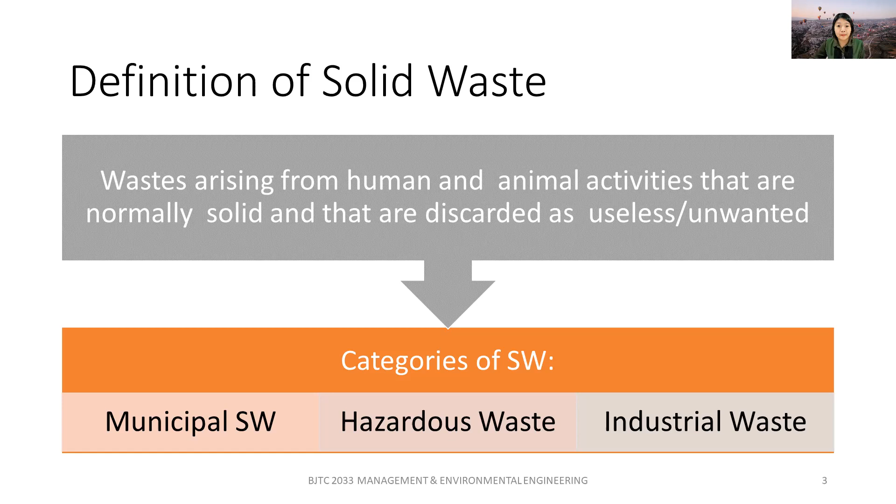Okay, so when we talk about industrial waste, then you can see from here.

You can see from here generally what the compositions of solid waste are. When you buy something, you need to know the contents, right? These are also the same - we have to know. When we talk about solid waste, I'm sure all of you usually think about recycling, that's the most common. So when you would like to recycle, how do you decide which types to recycle?

In a bag of rubbish that you usually throw outside your house, I'm sure it has a lot of things. It won't only have one thing, like kitchen waste such as fish bones, bones from meat, or vegetables that maybe aren't beautiful. So we need to know, in one bag of rubbish that you throw into the dustbin, what kind of compositions we have.

Usually for general cases, we can see the highest percentage by weight is actually organic waste, which comes from fish bones, from your food - those we call biodegradables. Mainly you can see from here we have 32% coming from organics, and then 29.5%, almost 30%, coming from paper. But nowadays, because recycling has been well educated and awareness given to all of us...

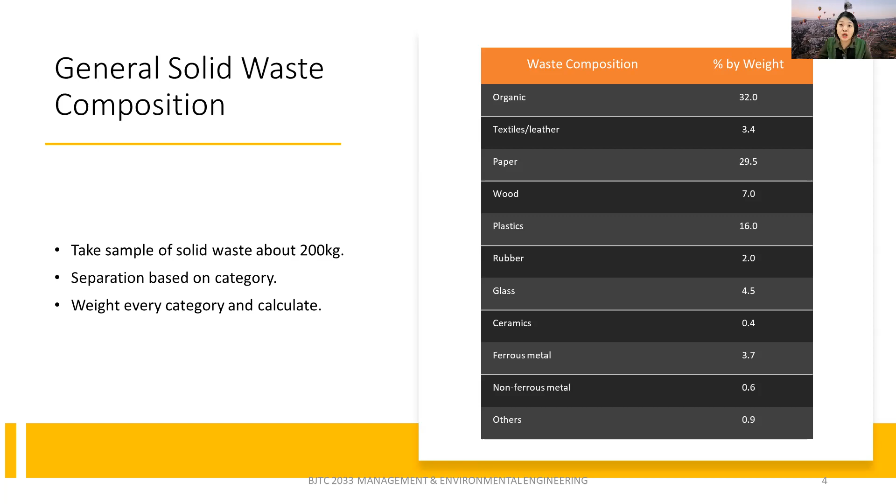So these are the characteristics and composition of solid waste. From here you can see we have domestic, combustible, non-combustible, ash, construction waste, industrial waste, and also hazardous waste. All of these you can actually read by yourself, I'm not going to go in depth for the explanations.

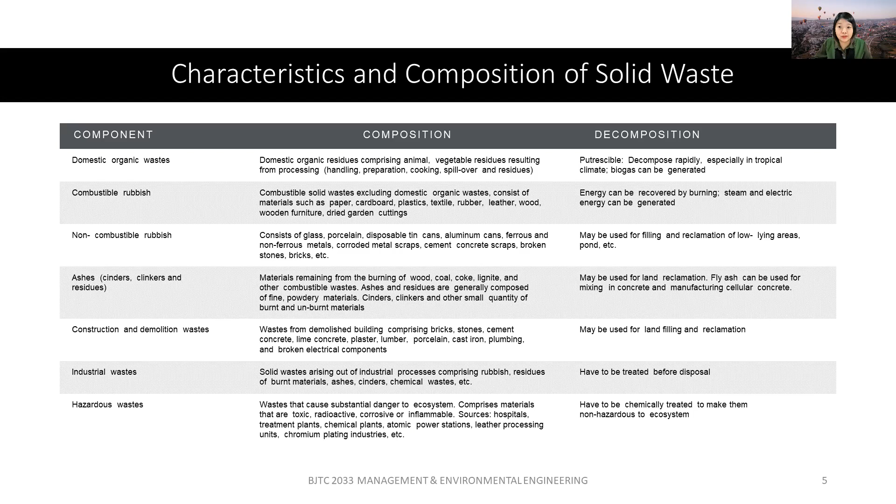So as previously mentioned, there are three types of solid waste that are major.

Okay, so first is the municipal waste. When we say municipal waste, it's things that come from our house, more general. Hazardous waste is waste that might pose substantial dangers to humans, plants, animals, any living organism.

So the third one is industrial waste. It's usually the waste that comes from industrial activities.

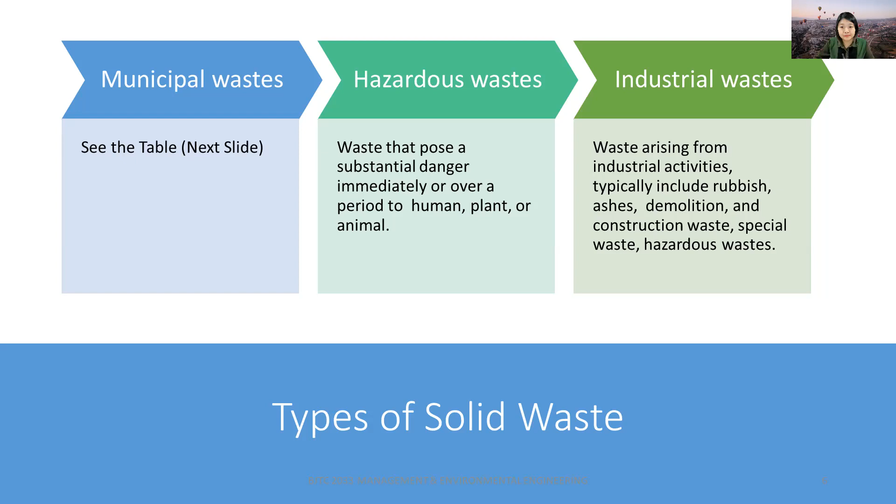Right, so this is the classification for municipal solid waste. The first one is food waste, coming from all of us. Then we have rubbish, things that can be recycled and have value, we call that rubbish. But if things have no value, we call it garbage. So these are the differences when you say this is garbage or this is rubbish. There are different meanings.

And then we have ash, demolition and construction waste, and then we have special waste, things like street sweeping, roadside litter or debris, dead animals, abandoned vehicles. And finally there are treatment plants, coming from our wastewater treatment plant or water treatment plant, something we call sludge.

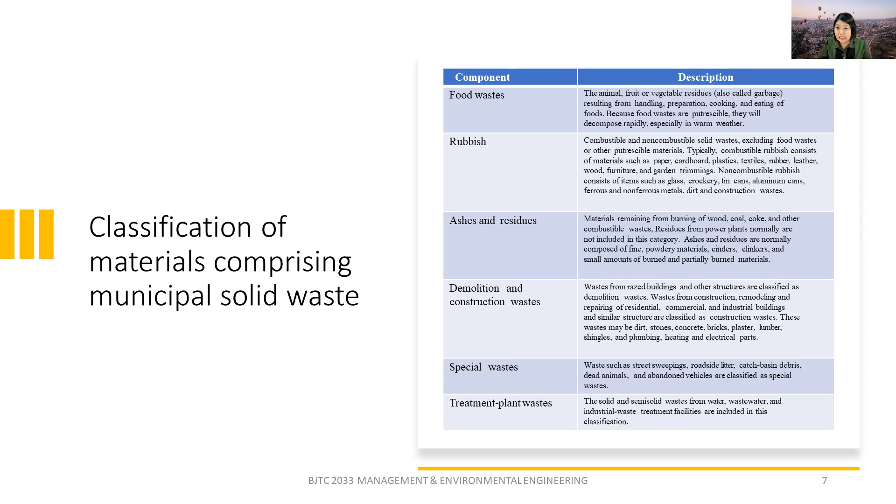So you can see here, when we say food waste, it includes animal, fruit, vegetable waste resulting from handling, preparation, cooking, and eating food. Because food waste is putrescible, it will decompose rapidly, especially during warm weather.

Okay, right, so the next one is generally where municipal solid waste comes from. First, from residentials, which is from our house. Secondly, from commercials, when you go to restaurants and eat there. Thirdly, the open area, things that are open on the street.

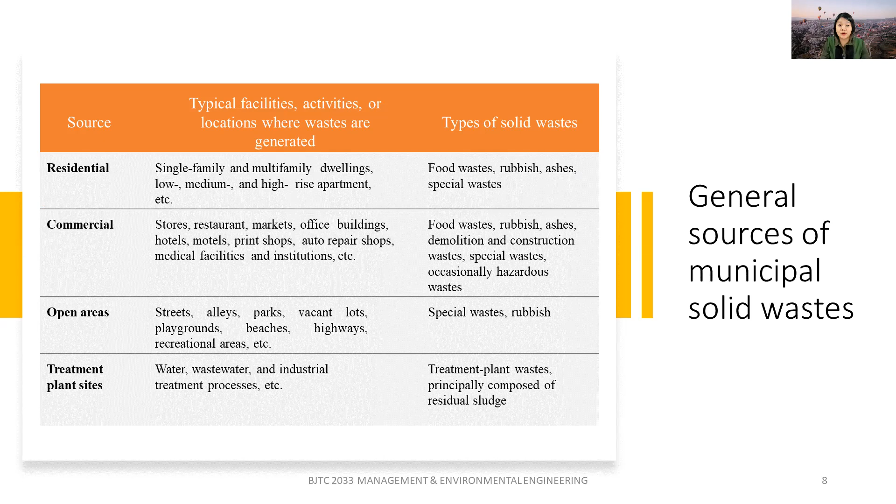So we have the trees, the leaves from the street, from the trees, and then from our car parks, playgrounds, all those areas. And then finally there's the treatment plant site, coming from the water, wastewater, and industry treatment process.

Okay, so when we have solid waste and we would like to manage it, we call it solid waste management. How are we going to manage it, and what is solid waste management? Solid waste management is the application of techniques to ensure the smooth execution of functional elements such as the collection, processing, and disposal of our solid waste.

Solid waste may also be called refuse. There's a difference in terms between the UK and the US. But mainly in Malaysia we call it solid waste, while in the US they call it refuse. The book reference I use is from the US, so it uses refuse. In my lecture notes you might see solid waste or refuse, but both are the same.

When we say garbage, it usually refers to food waste, or organic material, something that can decompose. When we say rubbish, it's something combustible or non-combustible, for example things that can be recycled like paper, glass, or wood waste.

So next time if you would like to scold somebody, don't call them rubbish, because rubbish in terms of solid waste is something valuable — paper we can sell, glass or even aluminum cans are all very valuable. Finally there's ash, which is something after burning, a very fine particle, usually white or black in color.

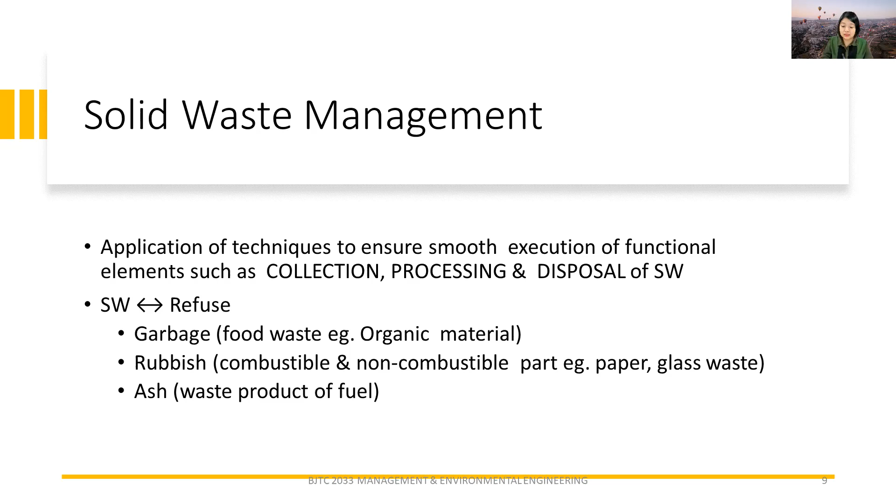We put it in our dustbin, so that's storage, whether it's the small one inside your house or outside your house. And then people will come and collect it, so we have collection, the third one.

After the collection, we go into different processes — there are three. Sometimes the trucks that come and collect will directly go to the landfill, so that's direct disposal.

Some places, such as in Kedah, didn't have this, but in Penang we have transfer stations. After they collect the rubbish or solid waste, they send it to the transfer stations, because the distance from the collection point to the landfill is too far. So they need one center which collects all of it from the area, and then combine it into a bigger truck before sending it to the landfill.

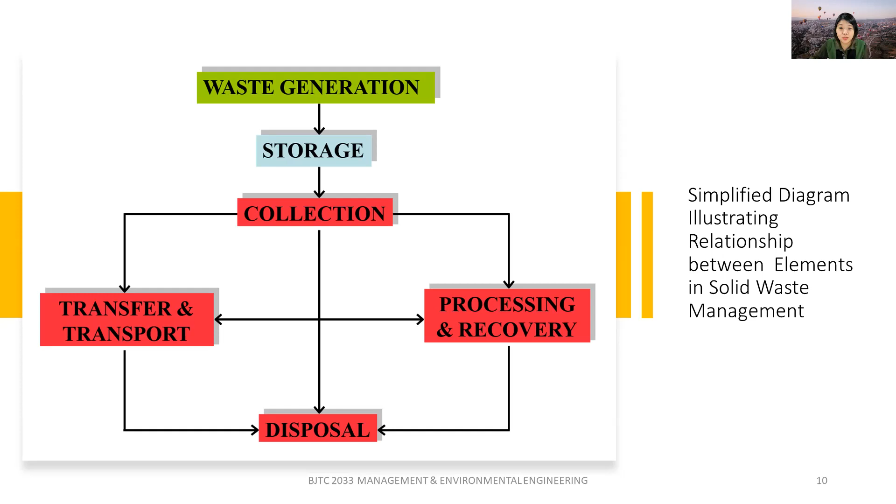Lastly, we have the processing and recovery stage, which means after collection, they send it to a place to do separations. They separate out what can be sealed and kept, and only what really needs to go to the landfill is sent there. Only the finished, unusable ones go to disposal, which is our landfill.

So this is how the integrated waste management implementation works for managing residential solid waste. This is only for your general ideas. You can look into it further and ask later.

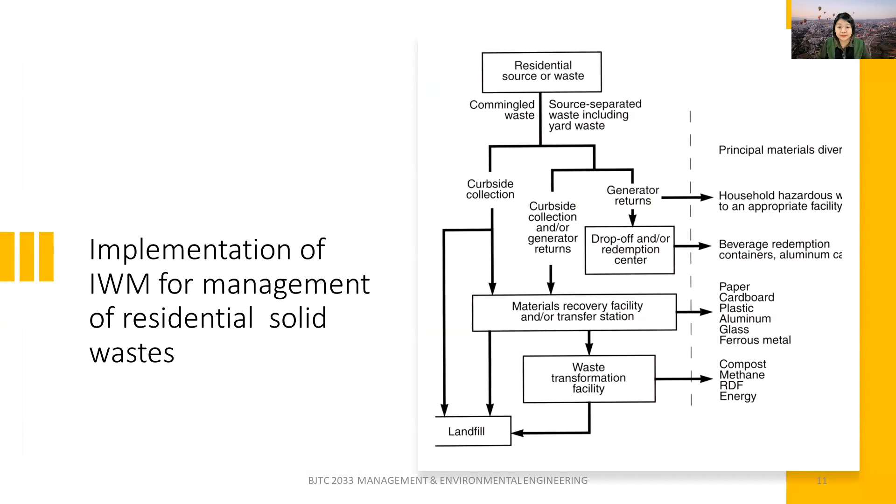So for the waste management hierarchy, which is a pyramid, when we talk about solid waste management, what is the first thing that comes to mind? I'm sure you will say recycle. But actually, if you remember the recycling concept or slogan, we always mention it as 3R, which means reduce, reuse, and recycle. In 3R, recycle is actually the last step. The first thing we need to do is actually to reduce.

How do we reduce the waste? We need to reduce the generation, reduce the creation of waste. So in the hierarchy, the first one is prevent: prevent creation of waste or reduce the amount generated. Secondly, we reduce the toxicity or negative impact of the waste. Thirdly, we reuse in their current form the materials recovered from the waste stream, or recycle and recover the material for use as a direct or indirect input to a new product. Then we recover energy through incineration, reduce the volume of waste before disposal, and finally dispose of the waste in an environmentally sound manner.

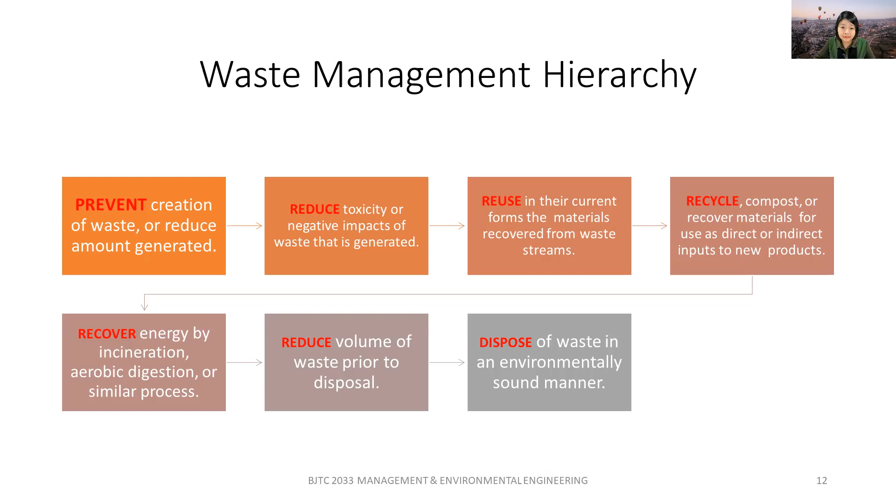So these are the pyramids - the pyramid should be upside down. The most preferred option is actually prevention, and the least preferred is disposal. We want to focus on the top: prevent, reduce, and recycle. Try to avoid creating extra solid rubbish, but if you cannot, then try to reduce it, reuse it, and only then go to recycling.

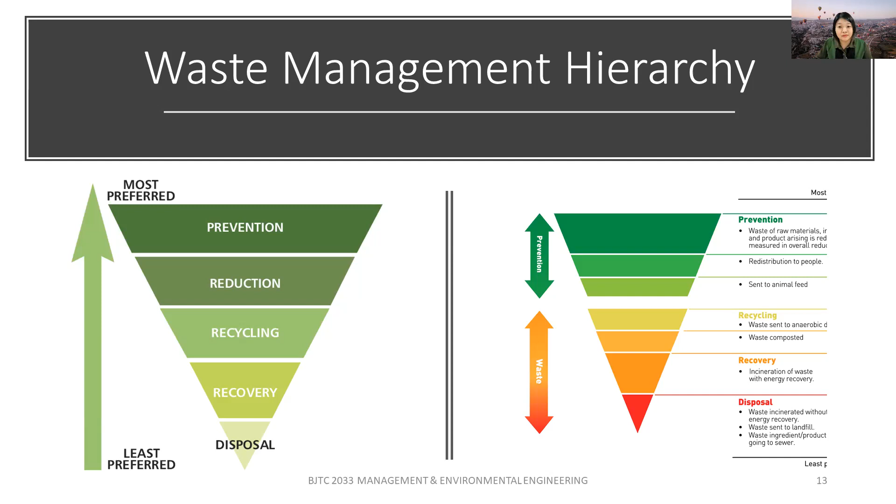So these are the changes that cause changes in solid waste management, due to urbanization or industrialization.

Last time, if you ask your parents or even your grandparents about buying fish or other things, what people used to wrap them, they might tell you banana leaf or newspaper. But now everybody says newspaper is dirty because of the black ink printed on it, so it's not safe.

So the change in solid waste content or ratio is actually coming from our living style, coming from us. You'll see the population change reflected in the waste characteristics. Rapid development and rising standards of living cause this. As population increases, waste also increases.

But there are also some good things, not just cons, that have improved. By having industrialization, we have more technologies. Those technologies allow us to have more modern techniques to help us recover the energy contained inside.

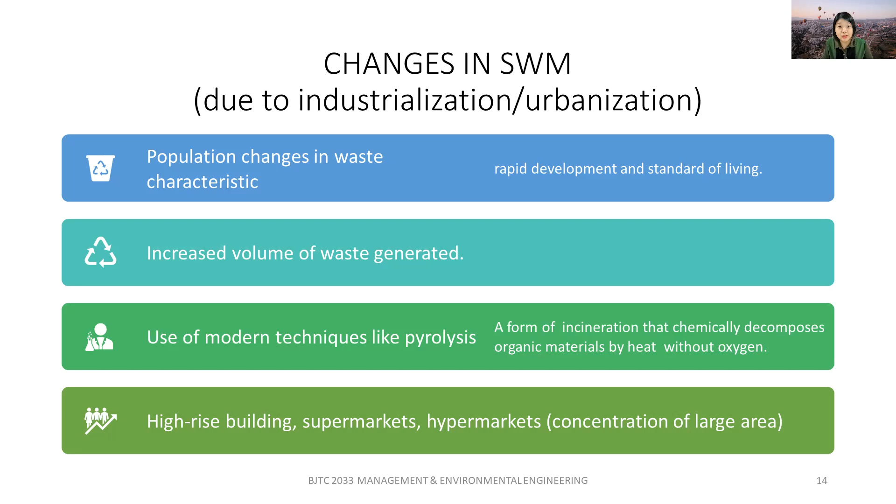But if you go to Tesco, Mydin, or C-Mart, those hypermarkets or supermarkets, the fish is actually put inside polystyrene and then wrapped with wrapping plastic, and then only put into a plastic bag for you. So there are different layers.

So the points we should consider are how we're going to reduce waste generation. First, we need to reduce raw material consumption. But then when we reduce raw material consumption, job opportunities will decrease. So how are we going to balance between the economy and the environment?

We also need to increase the rate of recovery or reuse of waste materials. In Malaysia, one thing that's quite strange to me is that we cannot recycle our glass bottles. However, overseas countries usually can recycle their glass bottles - after you wash them, you can immediately reuse them directly.

So the points for us to consider are the materials flow in society, and then the reduction in raw material usage, reuse of material, material recovery, energy recovery, and day-to-day solid waste management.

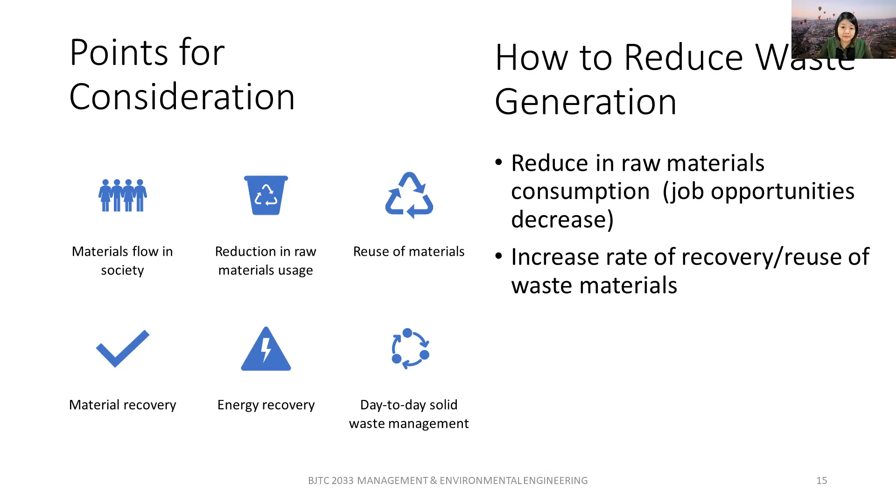The factors affecting the generation rate - if we compare Malaysians to Singapore, Japan, Europe, or USA countries, the waste generation in Malaysia is actually quite small, and that's quite common because our population also isn't as high as theirs. So the quantity of waste generated is usually influenced by several factors.

First is the climate conditions - if you go to a cold country versus a hot country, it will be different. Then the collection service, those that come to collect your solid waste, may also contribute. If the trucks come every day to collect, the waste you generate might be different. And some socio-economic activities, like night markets or fun fairs, create more solid waste.

Then there's the extent of salvaging and recycling - if you do a lot of recycling and separate your waste in detail, the waste you actually throw to the landfill is a small amount. Then public attitude, how you take it, how you feel about it, what is your awareness. And finally, legislation. And going back to climatic conditions also relates to the season.

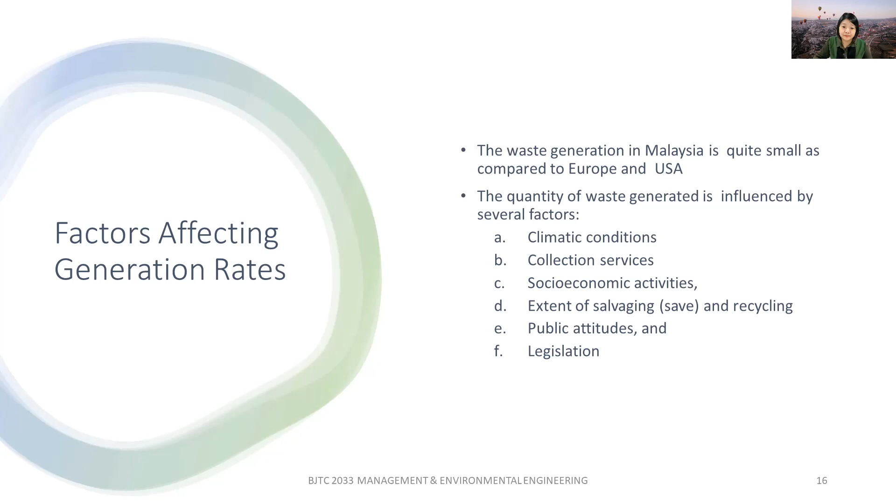So when you see, sometimes when we're coming to New Year or Hari Raya, we actually start cleaning our house, so we will throw away a lot of things. Okay, so now I'm just going to touch on more details of the collection system.

The factors that might be considered for the on-site storage of solid waste are the effect of storage on the waste components, the types of containers, the container locations, public health, and also aesthetics.

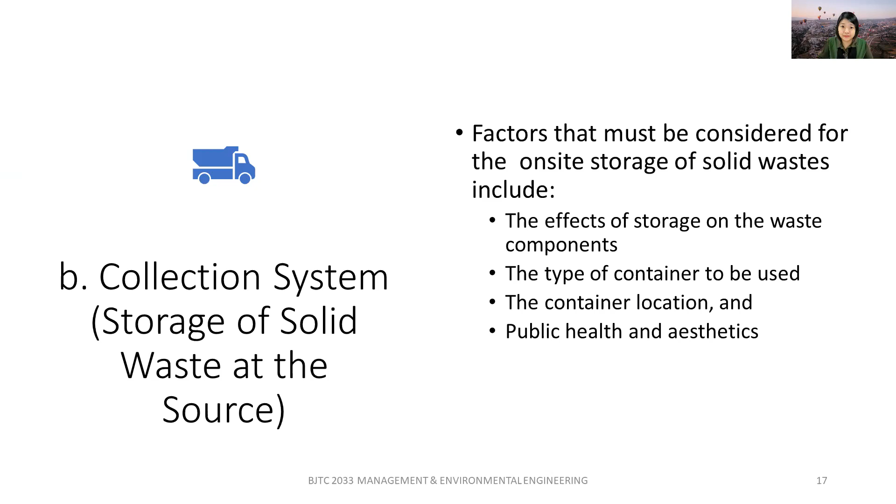When we talk about the type of containers, the solid waste bin or rubbish bin you have at home should come with a cover, because we need to prevent rainwater from getting in. When rainwater gets in, it becomes very smelly, degrades very fast, and grows bacteria very fast.

So here you can see the effect. The characteristic of the waste upon storage undergoes microbiological decomposition as a result. Remaining in storage containers, flies can breed in less than 2 weeks, and compounds such as hydrogen sulfide and methyl mercaptans will be produced, so you will smell things that are not nice.

The solid waste has different initial moisture content, and this is something we have to consider when having an on-site container. For mixed waste, papers will absorb the moisture from food waste and fresh garden trimmings. The longer the waste is stored until collection, the more uniform the moisture becomes distributed throughout the waste. If container lids are not used, waste will absorb water from rainfall and become saturated.

Contamination by small amounts of waste such as motor oils, household cleaners, and paints will reduce the value of individual components for recycling. For us, a lot of the time, there are things we say cannot be recycled because they're dirty. So I would advise that next time you want to recycle, please wash all the things.

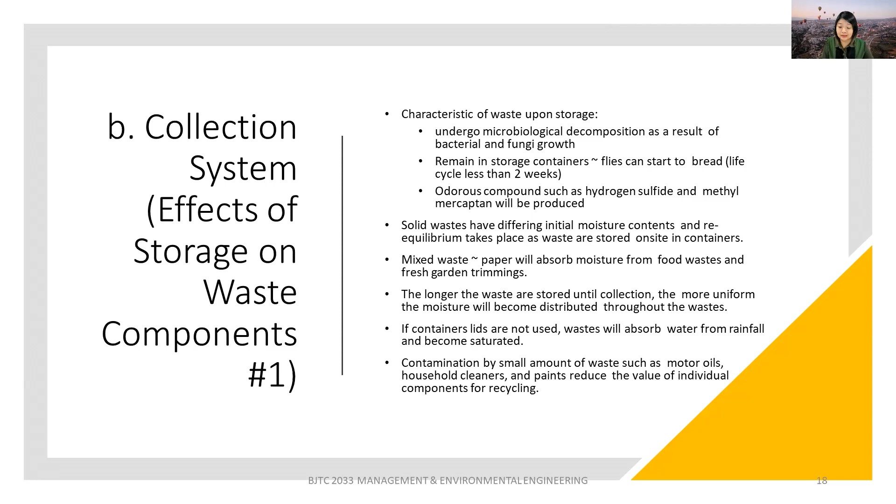Okay, so about the type of containers: the types and capacity of containers used depend on the collection frequency, meaning how often they come to collect your solid waste. I'm sure in Malaysia it's usually like 3 times a week, so you have collection every 2 days.

So the types of collection systems, you might be confused - is there any system for collection? Yes, later you will see in the next part. Okay, the characteristic and type of solid waste to be collected.

This doesn't happen in Malaysia because we don't separate our waste, so we don't have different collection days. But in other countries, they have a schedule - like Sundays they only collect food waste, Mondays only cardboard and paper, and then aluminum cans, PET bottles - they have all these separate collections. But in Malaysia, we dump everything together, so that's why we don't have this.

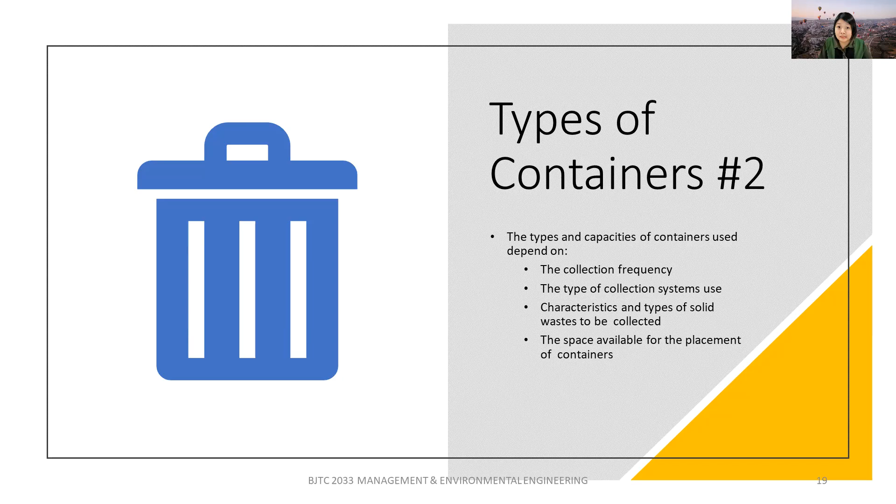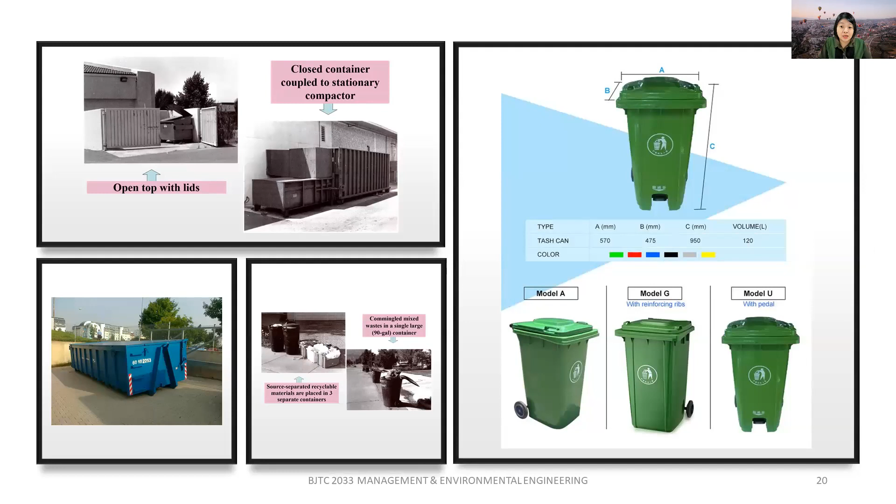Okay, the space available for the placement of the container - we also need to see if it's suitable to put such a big container in this area or not. So these are examples of the containers we have in Malaysia. The common one for our house would be this one.

So where should we place it? The container location should depend on the types of dwellings, or commercial and industrial facilities, the available space, and access to the collection service. The container must be at the curb side for collection, and for aesthetic value it must be moved or transported to the curb only on the days of collection. It's actually not good if we keep our rubbish bin outside our house all the time.

So you should keep it inside your house, and only put it out on collection days - for example, my house collection comes on Tuesday, Thursday, and Saturday, so on Tuesday morning only, I push it out. But what happens in Malaysia is the trucks that come sometimes don't have a fixed schedule, so you don't know when you should put it out. That's why everybody puts it outside directly, because sometimes they come at 5 o'clock in the morning, sometimes in the afternoon - it depends.

Okay, so sometimes for the alley collections, we will put it at the back of the property. So the width of the alley should be sufficient enough. Usually you will see this for the commercial ones. If you go to some shop lots, usually this rubbish bin won't be placed in front because it's not nice, so they will put it at the back. So when the trucks come, they need to go to the back road, the backyard, so you have to make sure that the street at the back is actually wide enough for them to pass through.

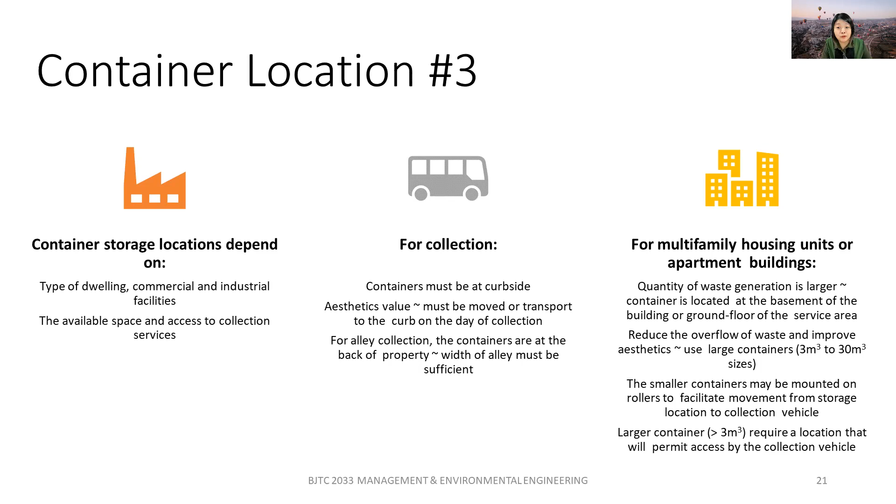Right, so solid waste collections and transport, while disposal is the most pressing problem, usually we only look into like, oh yeah, because landfill takes up a lot of our land, so it's the most expensive. We would like to have a land that we can use as a landfill. However, we never consider the collections. Have you ever thought about those trucks that come in? You never pay them, so why do they need to come and collect your rubbish? When they don't come to collect, you will scold them, you will get angry. But have you ever thought about how much you pay them? Have you ever paid for that service?

Okay, so this is why for those houses at the village, they actually didn't have this service, because that money that you pay for your, I need to mention in Malay, cukai pintu - that is actually paying for these services.

So the cities in Malaysia and those developing nations, collection operations are highly labor and capital intensive. Yes, we are still highly labor intensive. So you can check how many persons come to collect - I'm sure usually it's about three, one driver and then two staff that will pull your rubbish bin and then hang it on the trucks.

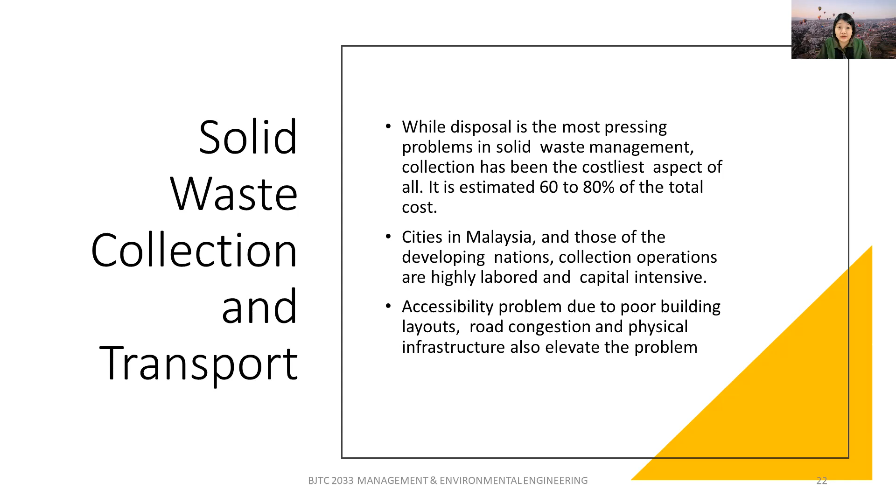Okay, so the accessibility problem due to poor building layout, road congestion, and physical infrastructure also will elevate the problems. When they have to make a lot of turns, then the cost will increase, because the trucks need petrol or diesel to move.

Okay, so the collection frequency is actually determined by the amount of waste to be collected, or also the waste characteristics, climate, cost, and public request. So in Malaysia, for the residential area, usually it's once every 2 days, but then some places maybe go for every day, so it depends. But then for communal centers, it will come daily. Those communal centers mean the residential area, the commercial area, or those places having a community center, so you will generate a lot of waste, so they need to come every day, such as market. If you go to market, there's one big one, so usually they will come and collect every day.

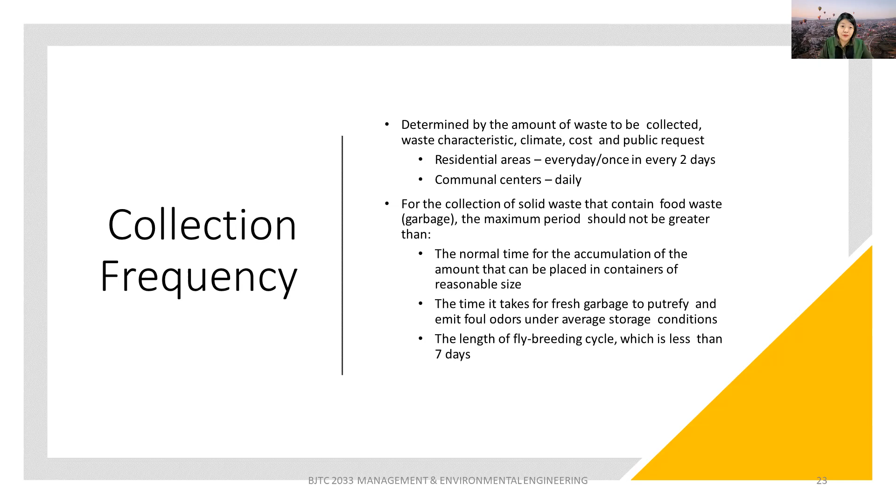Okay, so for the collection of solid waste that contains food waste, the maximum period shouldn't be longer than the normal time of accumulation that can be placed in a container of reasonable size, the time it takes for the fresh garbage to putrefy and then emit odors. And then the length of time for flies to breed is about less than 7 days, so you don't want to create a house or place for those flies or other microorganisms, right?

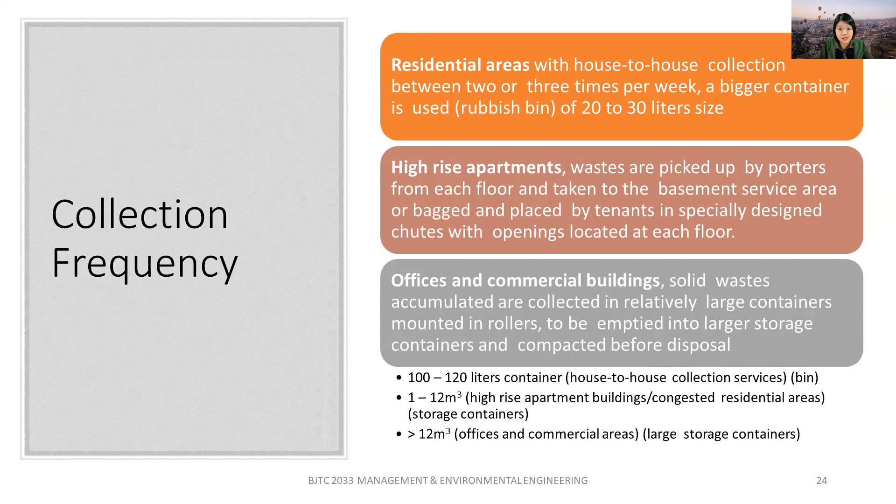So these are the frequencies that you can check and read by yourself. Okay, so these are three collection methods. First we have the curbside or alley pickup, which is common. The trucks, the lorries will come in and then collect house by house. This is actually the quickest and most economical, using standard containers. So the crew only empties the container into the vehicle, and then the owners will usually put it back to your place, okay, or return it back to the storage area. You just send it out and put it in front of your house.

Okay, second is set out and set back collections. This one, if your street, the road in front of your house, is very narrow, so they will usually only pass by the main road outside, so you have to send all these things to the outside.

Sometimes workers are in a hurry, so they come to your house and collect everybody's bin and put it outside. This eliminates the main disadvantage of the curb method, but the collectors need to enter private properties. They have to set out the crew and carry the full container from the residence, moving it to where it's set up, and after unloading to the trucks, they have to send it back.

The backyard method is for aesthetic value because the rubbish can is at the back of the house, so it's nicer and convenient for the house owner, but it's quite costly. The collector also sometimes needs to collect waste from a few houses using large containers, and then only dump into the collection vehicles.

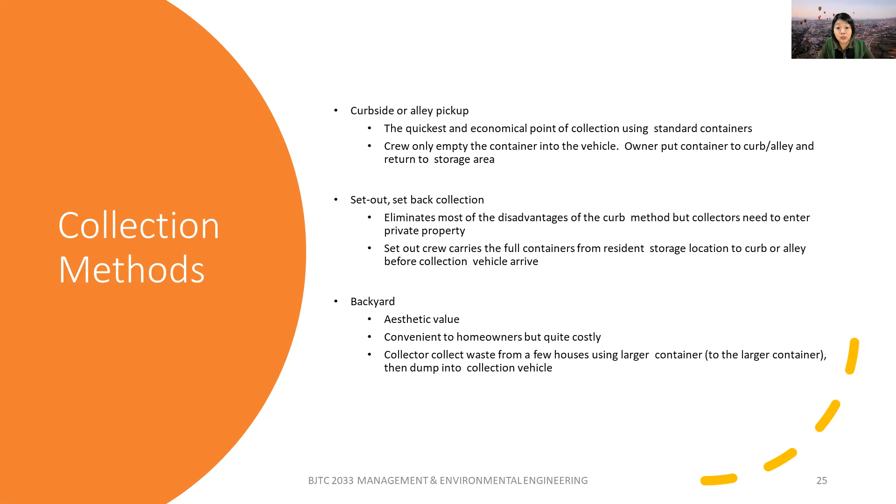When it comes to collection, there are two types of collection system. One is the stationary container system, usually for residential and commercial use. Secondly, we have the hauled container system, SCS and HCS. For HCS, we have two methods: one is the conventional method, and one is the exchange container mode. You'll see this in detail in the figures after this. This helps you identify which one is more economical, so when you go to work in this kind of company, you'll know how to plan.

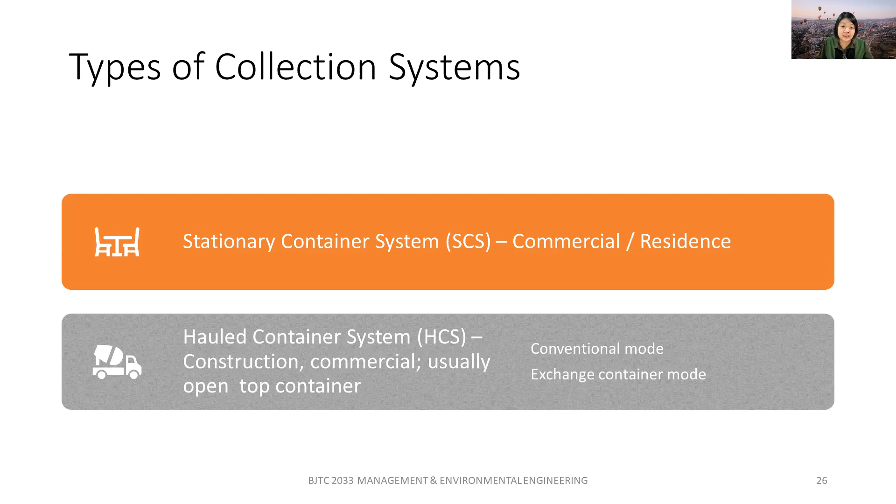For SCS, it's the system where the container used to store waste remains at the point of generation, just like your house. The rubbish can stays, except when it moves to the curb or other locations to be emptied, so you only move it to the roadside to be emptied. Usually SCS uses a mechanically loaded system, though it needs some specs for manual loading. Last time it was mainly manually loaded, now it's mechanical - you hang it, haul it inside, and compact. This is usually used for residential and commercial areas, using vehicles with internal compaction so you can compact more waste.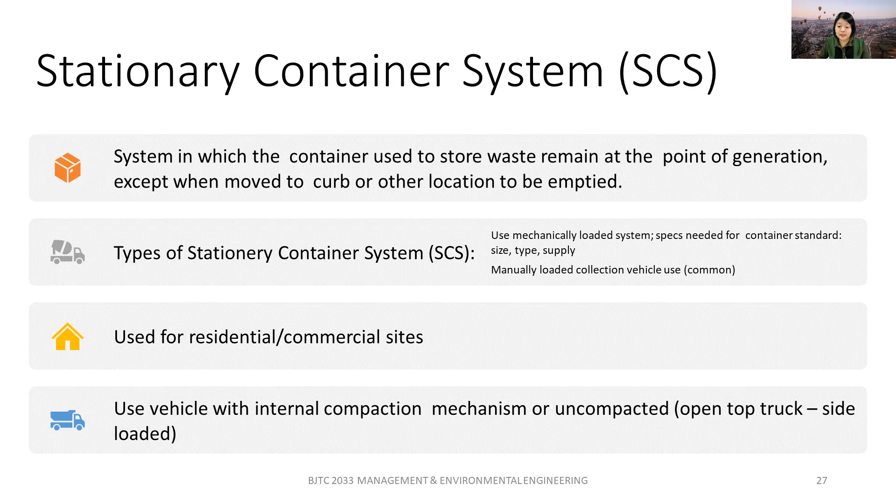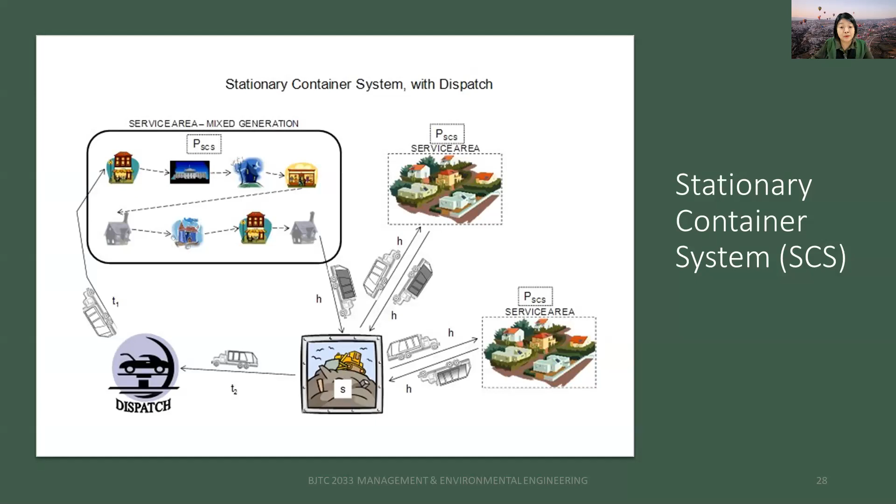From this figure, you can see the empty lorry dispatched from the parking area. It comes to your house, everywhere, and collects, picks it up. If it's full, it sends to the landfill, then goes back again, picks up and sends, goes and comes back, and returns to the parking. These are examples usually used for the stationary container system.

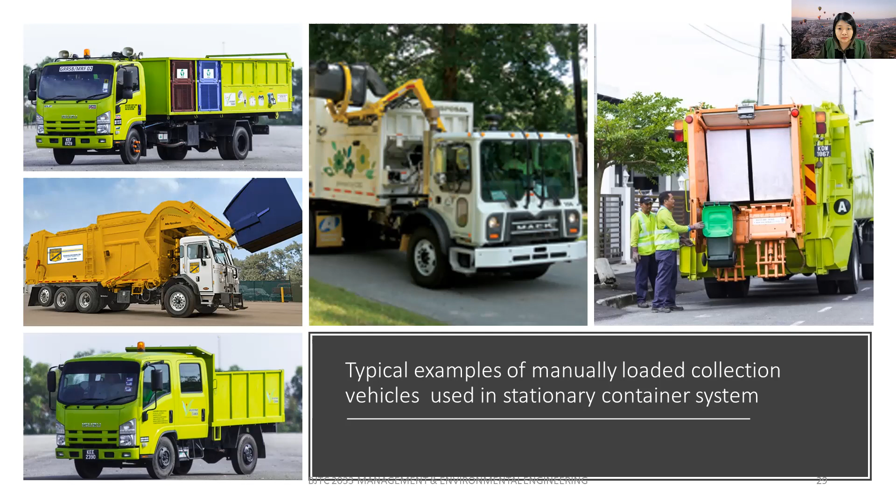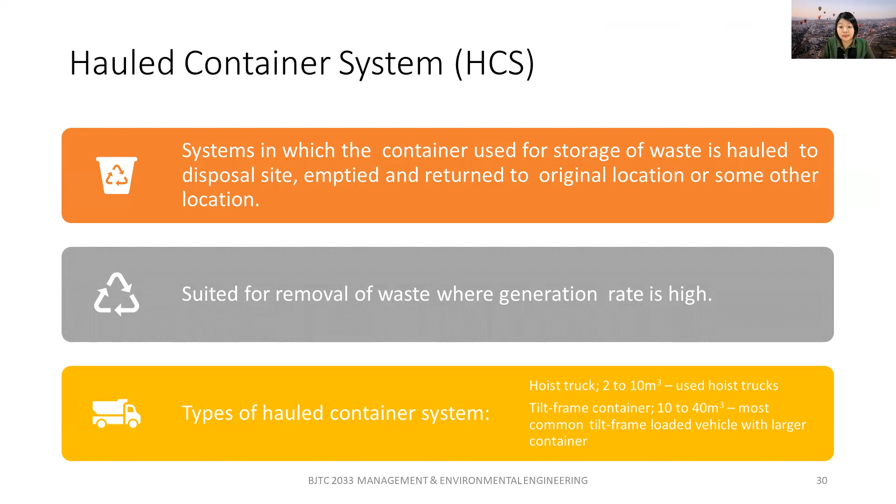For the hauled container system, the container used for storing waste is hauled to the disposal site - when we say haul, it means pull (tarik). It pulls everything empty and returns to the original location or other locations. This is more suitable for removing waste where the generation rate is high. The types of containers usually used are the hoist truck or tilt-frame container.

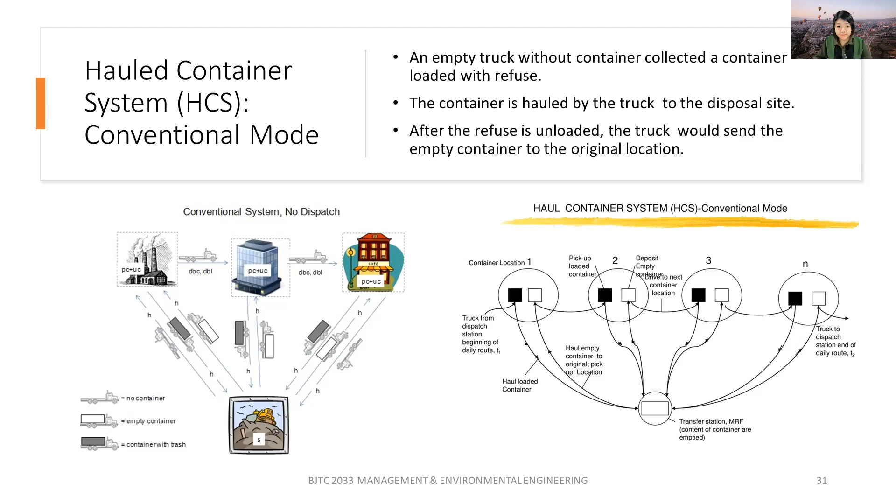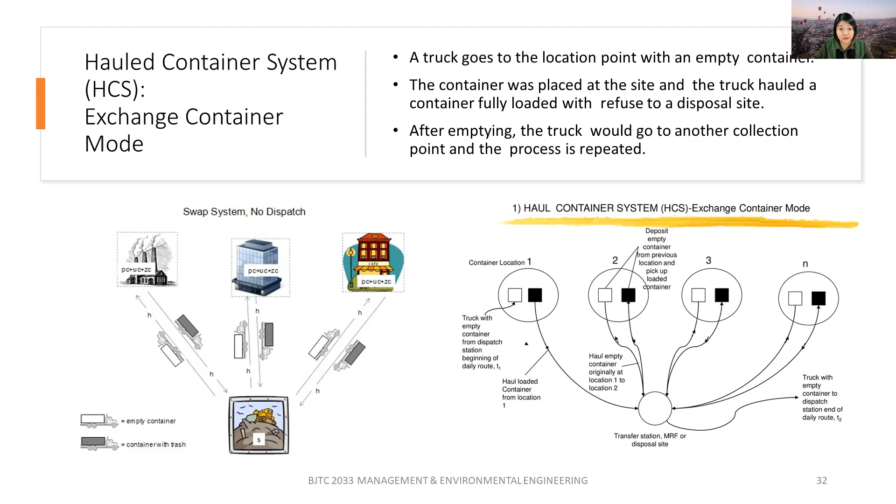For exchange container, when the trucks go, it goes together with the empty container. It carries the empty container, leaves it there, and then brings the full one to the landfill. After unloading, the full one becomes empty and it goes to the second site. Come back with the full, unload, go with the empty, come back with the full. Right?

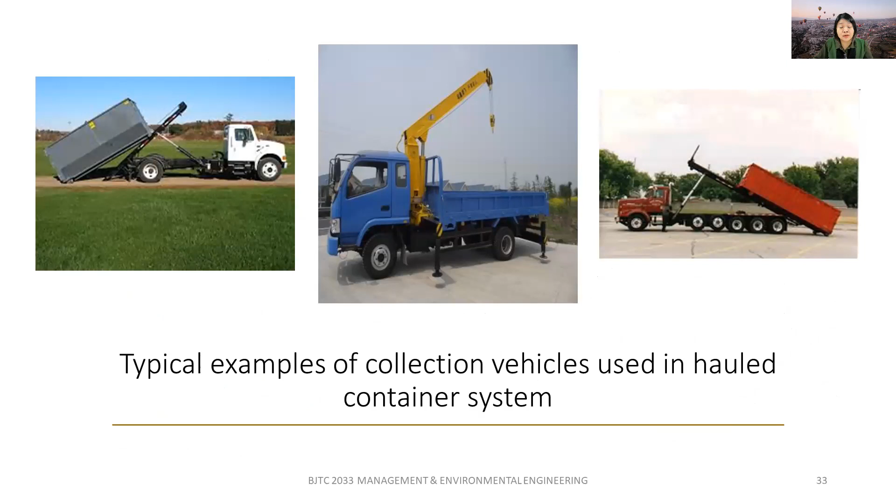Right, so next we will go into transfer and transport. If you still remember at the start, the simplified diagram, there was one transfer and transport that I mentioned about the transfer station. You need one place to change, like an interchange, transit stations. It refers to the facility and accessory used to effect the transfer of waste from relatively small collection vehicles to larger vehicles for transport, processing, or disposal.

In some places the big trucks cannot go in, so they need to use a small one. But using a small one, if you count the cost, may not be economically worth it. So they need one place to transfer from the small one to the bigger one.

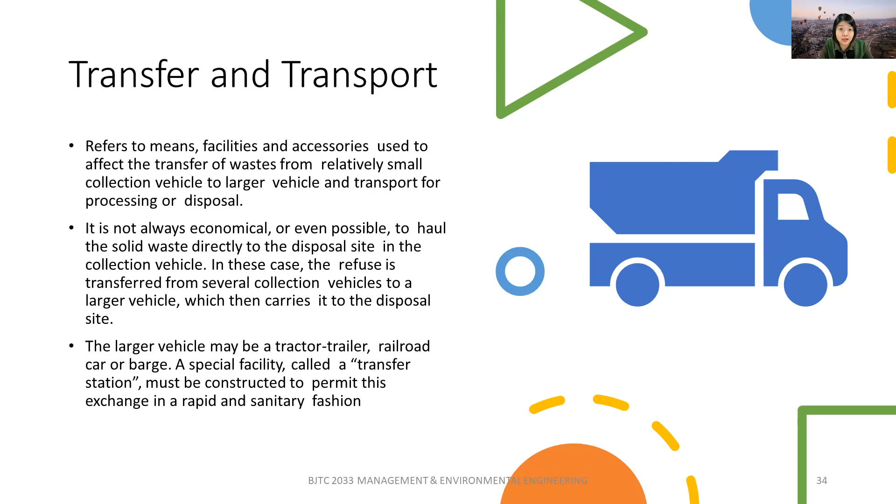It is not always economical to haul solid waste directly to the disposal site in the collection vehicle. In this case, refuse is transferred from several collection vehicles to a larger collection vehicle, which then carries it to the disposal site. The largest vehicles may be tractor trailers, railroad cars, or barges. A special facility, called a transfer station, must be constructed to permit this exchange in a rapid and sanitary fashion.

So this is the process. Start from your household, the compactor or truck will come. Sometimes it will go directly to the landfill, but sometimes because the journey is too far, say 100 kilometers, it's not worth it to send it directly. So you will send it to a transfer station where it will be compacted into a silo and then go to the landfill.

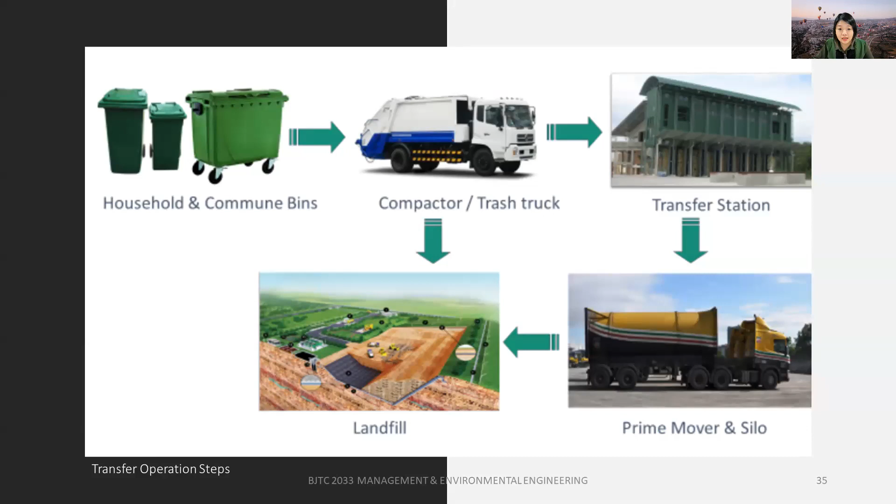So why do we need these transfer operations? Because transfer and transport operations become a necessity when the haul distance to the disposal site or material recovery facility is no longer economically feasible.

Just imagine if your house, the place that collects, and the landfill have a journey of about 50 or 100 kilometers. If you collect, send, and then would like to come back for a second trip in one day, definitely no - it cannot go for two trips. So they also become necessary when the disposal site is in a remote area or not accessible by the collection vehicles.

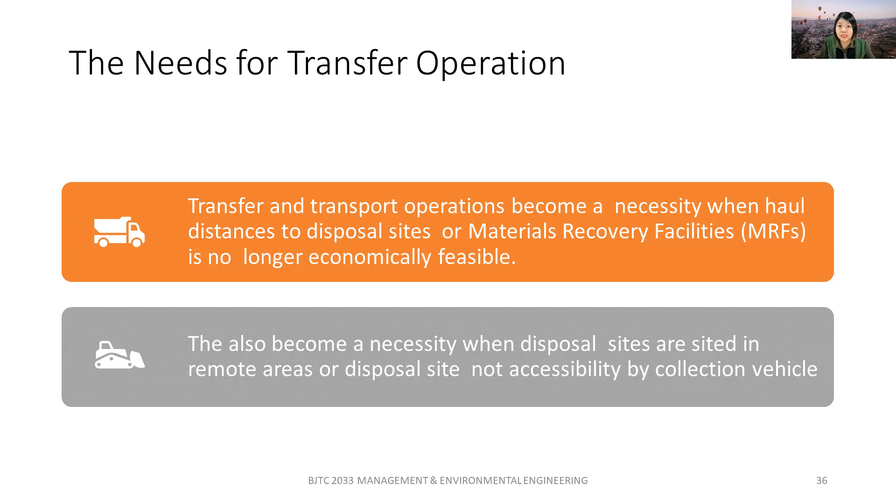So these are the factors that might influence whether to apply transfer operations. First, when the haul is too long, the driver calculates by trips and wants to get more trips in a day, so illegal dumping might happen due to excessive haul distance. Also, the location of the disposal site relatively far from the collection route, when it is more than 16 kilometers, and the use of small capacity collection vehicles, generally less than 1.5 cubic meters.

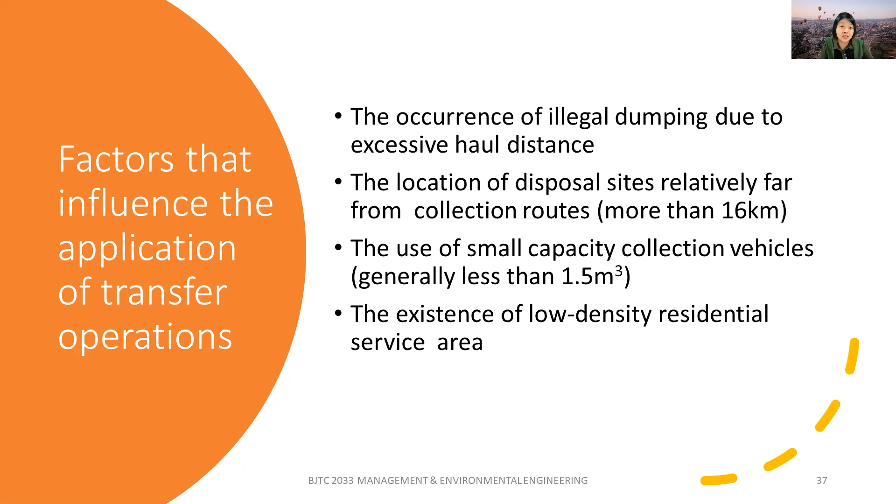And also the existence of low density residential service areas. If an area only has 10 houses, it's not worth having big trucks come just to collect and then go back.

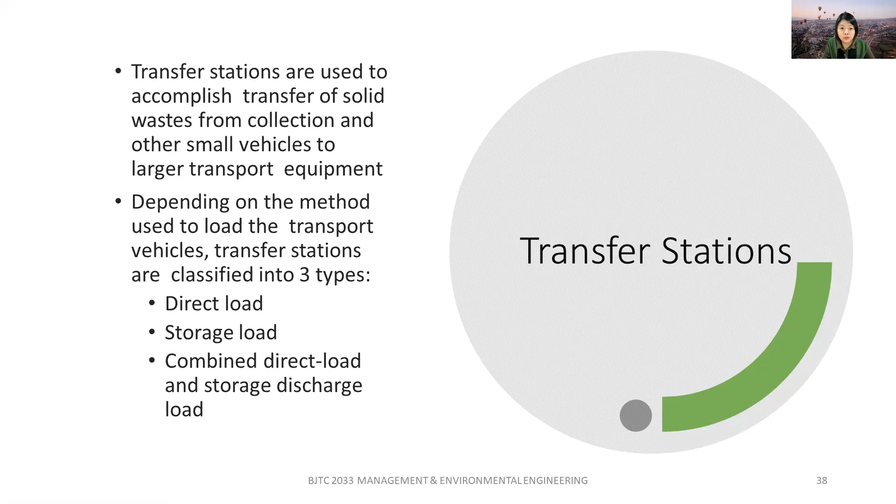Right, so what is a transfer station? Transfer stations are used to accomplish the transfer of solid waste from collection vehicles and other small vehicles to a larger transport equipment. Depending on the method used, there are three methods: one is direct load, second is storage load, and lastly is a combination of the direct load and storage discharge load.

So the factors that you need to consider when you would like to design a transfer station: first, what kind of transfer operations you would like to do; second is the capacity requirement; the size, either big or small; equipment and accessories; environmental requirements; and finally the location.

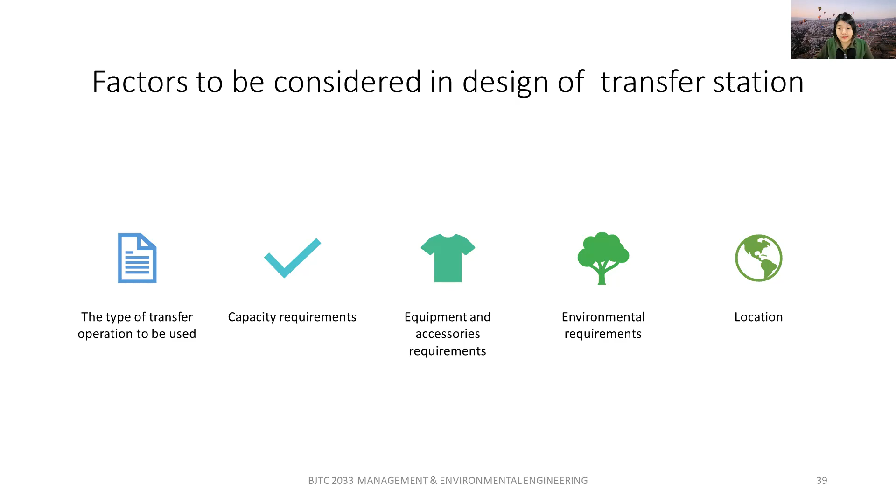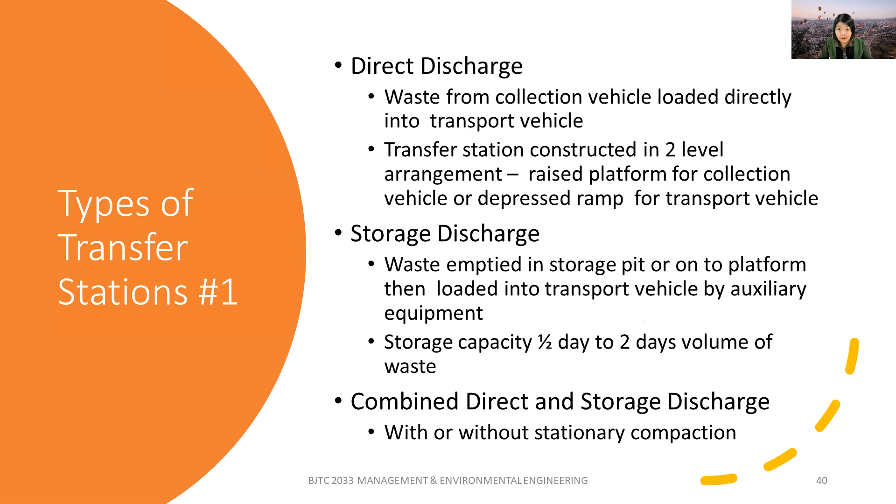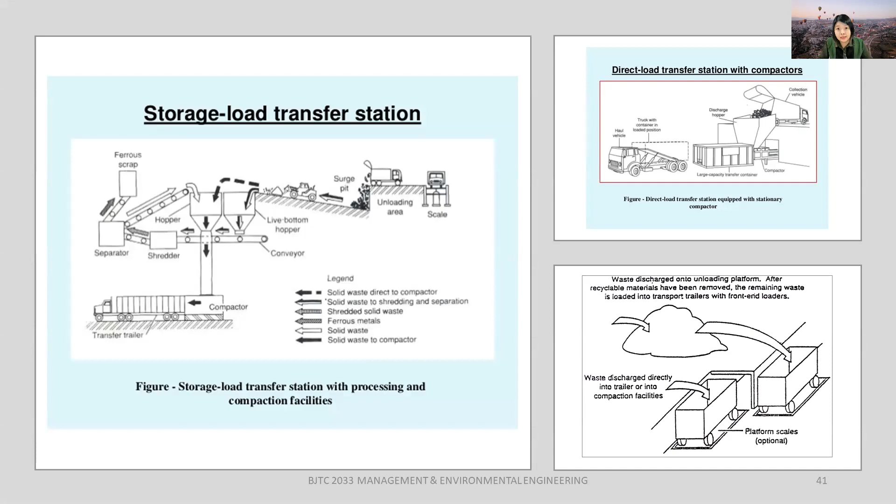First, do you want direct discharge, storage discharge, or a combined one? You have to identify this. Direct loaded means when the trucks come in, they directly discharge. Storage means it's put in open areas to store first and then slowly compacted. Or you have both together - when lorries are available, you discharge direct; if no container is available, you store it. There are three types.

Okay, so the capacities - how big is your place? You need to know that you shouldn't let the collection vehicles wait too long to unload, and you have to compare the cost of the larger size with the time of waiting. Is it economically worth it?

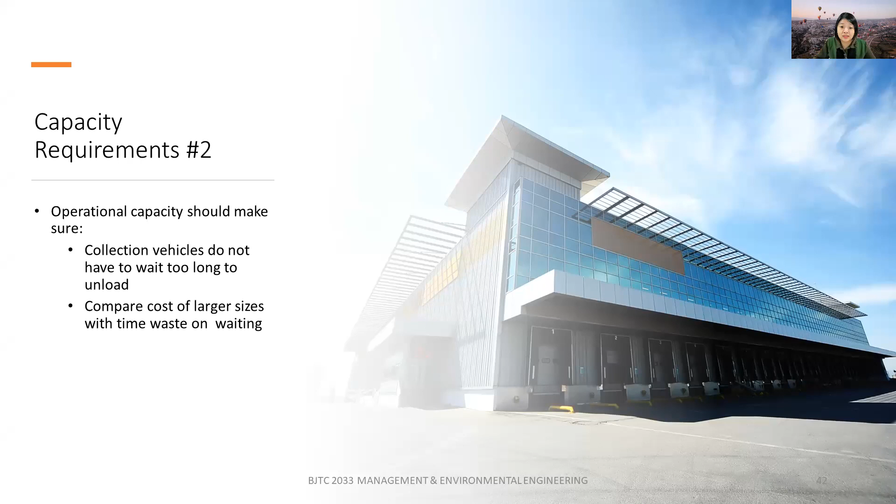Okay, so equipment and accessories are requirements - these are the elements we have. The scale should be provided at medium and large transfer stations because we need to make sure that the in and out is balanced. So we have the hoppers, compactor, and also the front loaders.

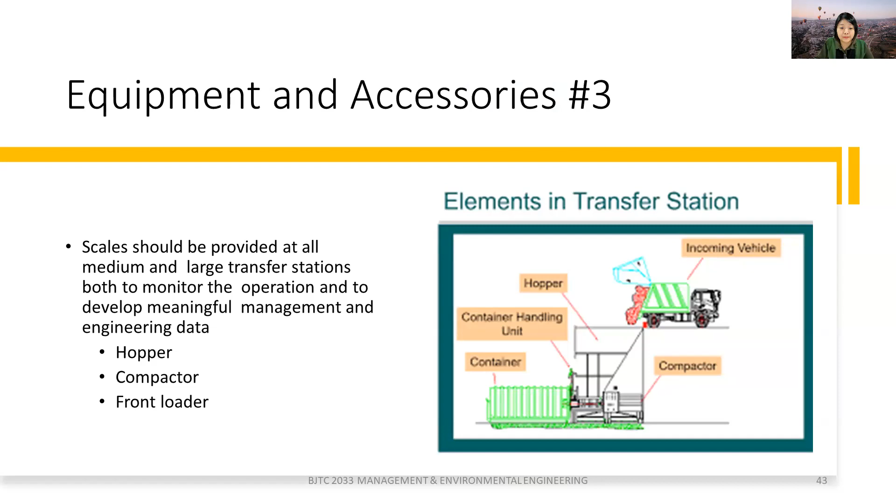Then the environmental requirements - who wants to stay or live together with solid waste? You will feel it's smelly. So you need to find a place that is actually an enclosed area. The stations are constructed with materials that are easy to clean and maintain because you need to wash them every day, otherwise it will be very, very smelly. You need to use windscreens or barriers or blown papers to cover the surroundings, and you can't accumulate waste in big quantities.

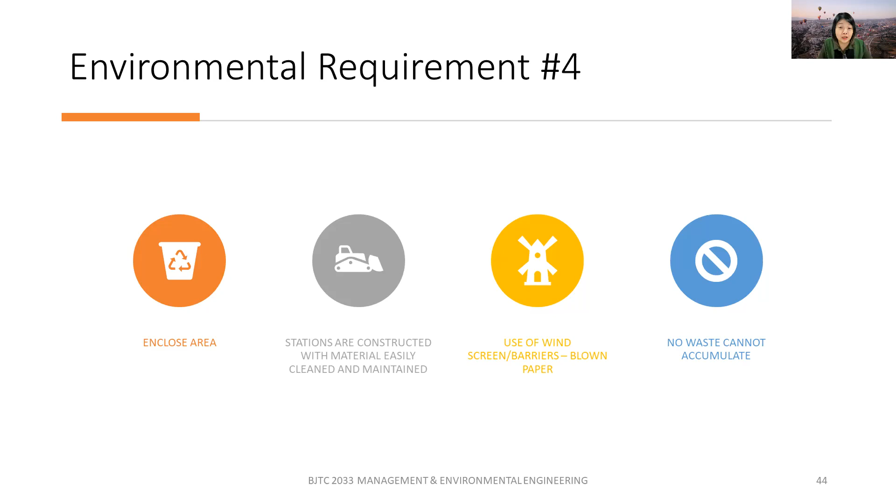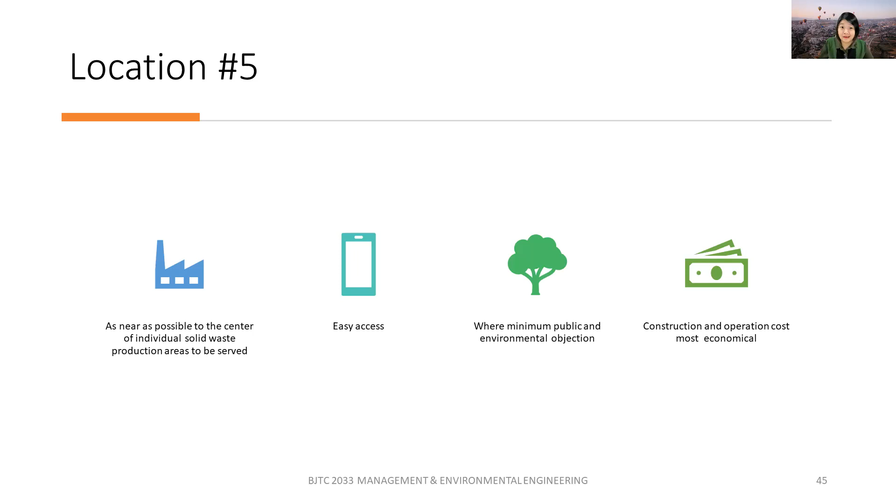Then locations - where we would like to put it. For sure it should be as near as possible to the center of individual solid waste production areas, and not far from the landfill. It needs easy access, and it needs minimum public and environmental objections - for sure, if it's close to your house, you will object. The construction and operational costs must be most economical, and you have to calculate because it's everything on money.

For the transport means and methods - the most common means used to transport waste from transfer stations are trailers, semi-trailers, and compactors, like a silo size. The vehicles used, if they would like to go onto the highway, need to meet certain requirements: the waste must be transported at minimum cost, the waste must be covered during the haul operation, the vehicle must be designed for highway traffic, and the method used for unloading must be simple and dependable, such as self-emptying.

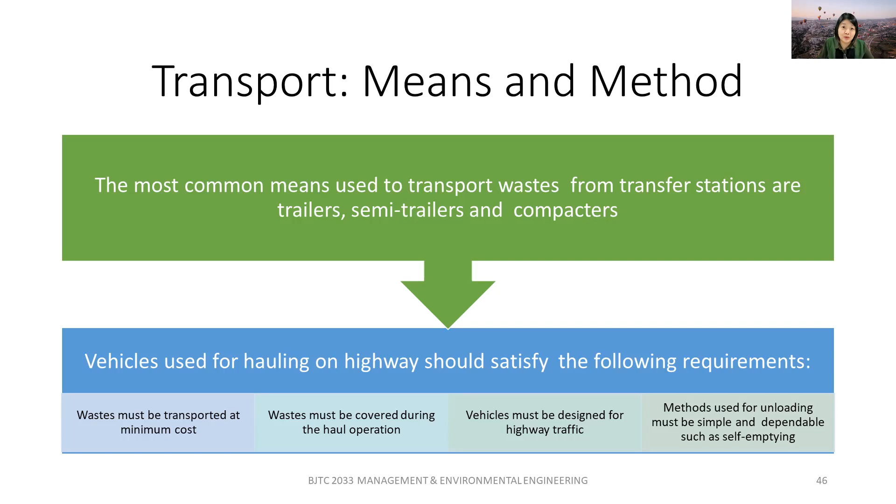Right, okay, so thank you, and that's all for our chapter 9 on solid waste.